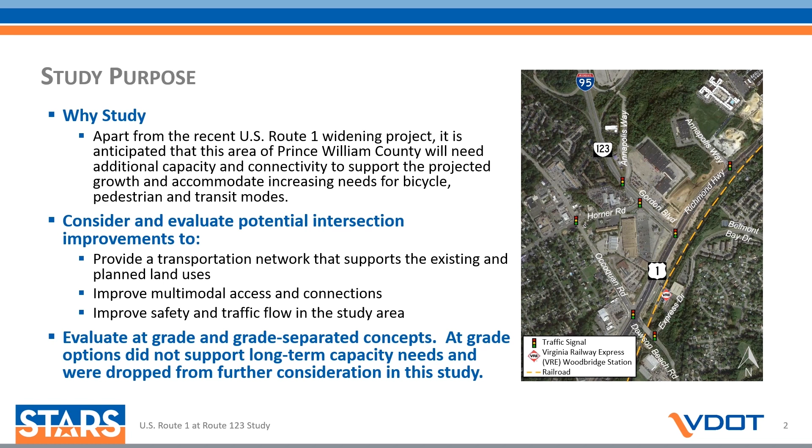Operational and safety analyses showed that the current traffic signals along U.S. Route 1 and capacity limits of study area roadways will contribute to significant congestion in the future, and the road network lacks options for east-west travel. The intersection of U.S. Route 1 and Occoquan Road and Dawson Beach Road is the only access point to the Belmont Bay community and the Virginia Railway Express station on Express Drive, serving over 12,000 vehicles daily.

There have been a few recent projects already underway or completed within the study area, and these were taken into consideration for this study. In 2020, construction was completed on a project that widened U.S. Route 1 from 4 to 6 lanes between Mary's Way and Annapolis Way. This also added a shared-use path along southbound U.S. Route 1 and a sidewalk along northbound U.S. Route 1. While this project brought many benefits to the corridor, it was designed as an initial phase of improvements at the U.S. Route 1 and Route 123 intersection. A potential second phase would extend Route 123 over U.S. Route 1 and the railroad to Belmont Bay Drive to improve mobility in the study area. Prince William County is also widening the section of U.S. Route 1 between Mary's Way and Featherstone Road, and has plans to extend Annapolis Way from Route 123 to U.S. Route 1.

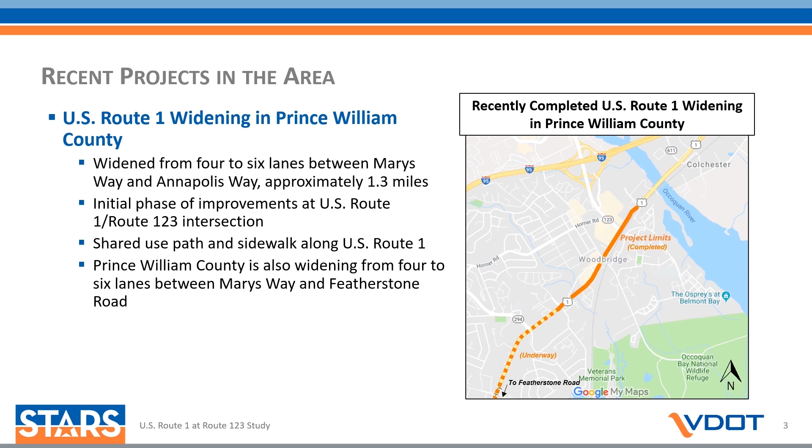In 2019, Prince William County adopted the North Woodbridge Small Area Plan. This plan provides a vision and an implementation plan toward redevelopment and revitalization. Transformational changes are planned for the land uses in the vicinity of the study intersection, including the proposed mixed-use North Woodbridge Town Center. Additional growth is expected in the Belmont Bay community and along the U.S. Route 1 corridor. This STARS study coordinates land use planning and transportation by including better accommodation of the North Woodbridge Small Area Plan as a factor when evaluating improvements. Plan density, types of land use, and mobility are being considered.

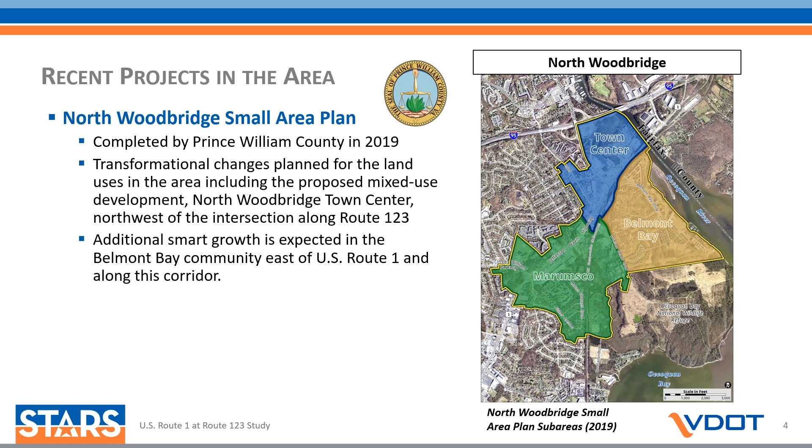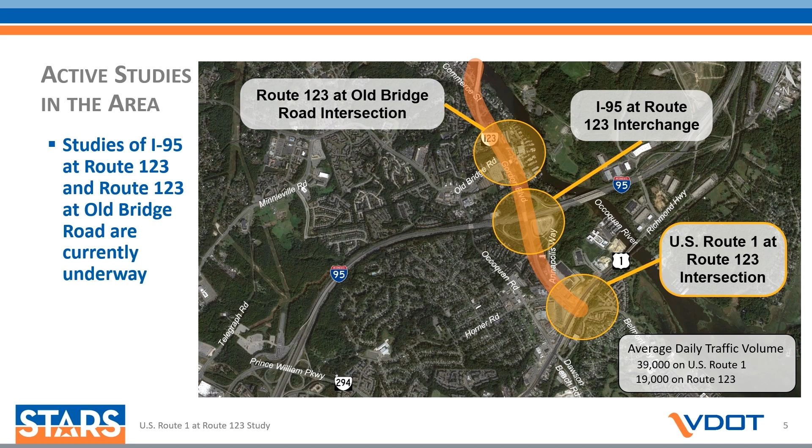This STARS study is being conducted as a part of a larger study of the 123 corridor, where additional improvements are being identified at both I-95 exit 160 and at the Old Bridge Road intersection. This video focuses on the U.S. Route 1 at Route 123 intersection. Public outreach was recently completed for the I-95 interchange, and additional public outreach activities will be conducted later this spring for potential improvements under consideration at Old Bridge Road.

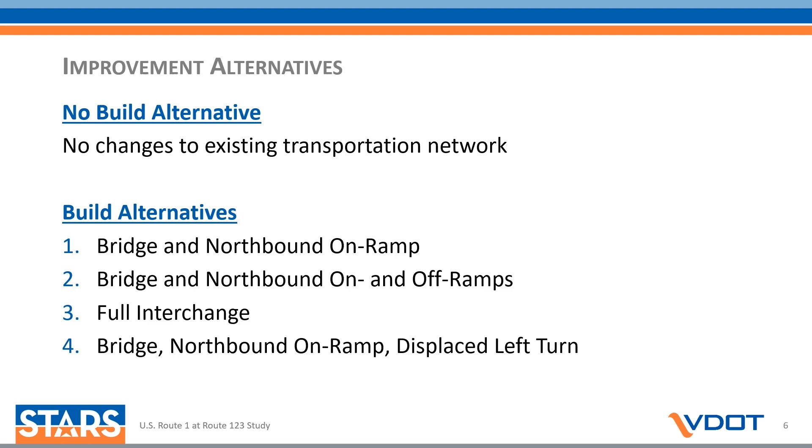The study team has conducted analyses of several improvement concepts. The no-build alternative, used as a baseline comparison, provides no additional changes to the existing transportation network and represents how the network is expected to operate under future conditions with no additional improvements. 4 potential build alternatives are expected to improve mobility in the study area with a new connection over U.S. Route 1 and the railroad tracks. This provides additional travel opportunities for pedestrians, bicycles, transit, and vehicles. Next, elements of the 4 build alternatives will be reviewed.

The first alternative, bridge and northbound on-ramp, consists of a new Route 123 bridge over U.S. Route 1 and the railroad tracks to improve connectivity with Belmont Bay and VRE. A ramp from the bridge to northbound US Route 1 will provide a safer movement for turns from Route 123 to northbound US Route 1. The ramp will add a new connection from Belmont Bay to northbound US Route 1. In this alternative, vehicles traveling from northbound US Route 1 to Route 123 reroute from the existing intersection to turn right on Dawson Beach Road and left on Express Drive to reach the Route 123 bridge. A second left turn lane is added on Dawson Beach Road, and traffic signals can be timed to support this movement. This also allows the existing traffic signal at the intersection of US Route 1 and Route 123 to be removed.

Some other existing movements would change with the addition of the bridge. Vehicles traveling from southbound US Route 1 to Horner Road must continue to Occoquan Road. Vehicles traveling across the bridge to Gordon Plaza Shopping Center must continue to Annapolis Way. Through movements across US Route 1 from Occoquan Road and Dawson Beach Road are prohibited, but can use the bridge. This will improve operations at this traffic signal and provide more green time to other movements. New pedestrian and bicycle connections include a shared use path across the bridge and along northbound US Route 1 from Route 123 to Annapolis Way, a new crosswalk across US Route 1 at Annapolis Way, and new crosswalks at the intersection of Route 123 with Belmont Bay Drive and Express Drive.

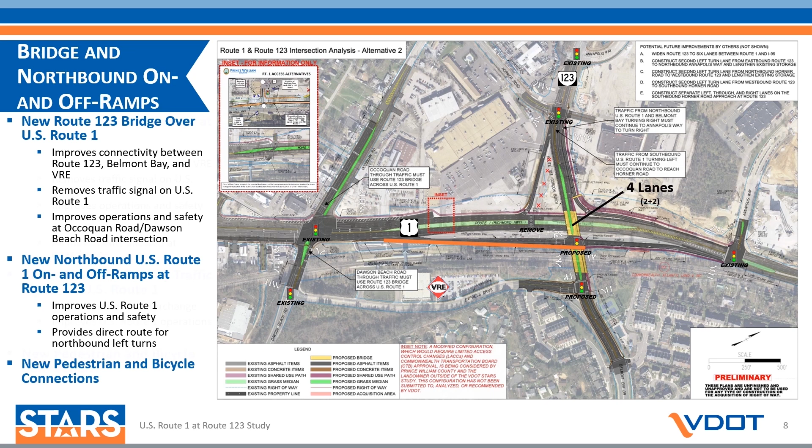Pedestrians or bicycles traveling along northbound US Route 1 must cross Route 123 at the ramp intersection instead of traveling under the bridge, like in Alternative 1. All other features of this alternative remain the same as the previous alternative.

The third alternative, full interchange, builds upon the previous two alternatives by adding southbound US Route 1 ramps to and from the bridge. This allows all movements to be made at the interchange and provides traffic signal-controlled crossings for all pedestrians and bicycles. Left turns from southbound US Route 1 to Dawson Beach Road are rerouted to the interchange. Left and through movements from Dawson Beach Road are also rerouted to the interchange.

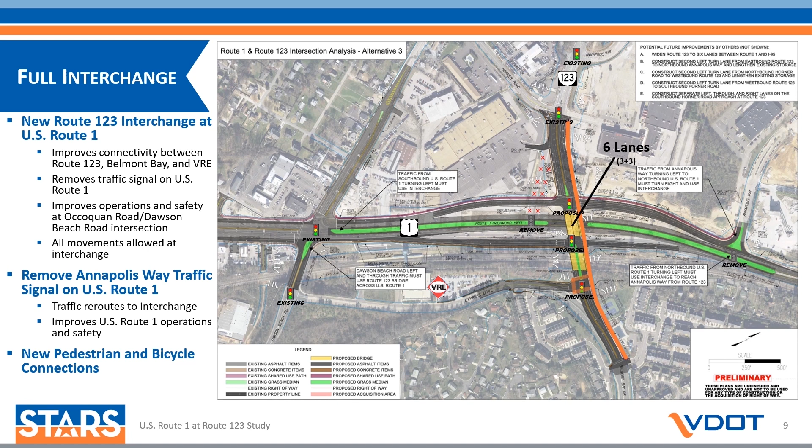The traffic signal at US Route 1 and Annapolis Way is removed, and only right turns are allowed to and from southbound US Route 1. Left turns from northbound US Route 1 to Annapolis Way are rerouted to Route 123. Left turns from Annapolis Way to northbound US Route 1 are rerouted to a U-turn at the interchange. New pedestrian and bicycle connections include a shared use path across the bridge, and new crosswalks at the intersection of Route 123 with Belmont Bay Drive and Express Drive, and the two ramp intersections.

The fourth alternative, bridge, northbound on-ramp, displaced left turn, is most similar to alternatives 1 and 2 with a few key differences. It includes the Route 123 bridge and ramp to northbound US Route 1, but maintains the existing traffic signal on US Route 1 for left turns to Route 123 under the bridge. To improve operations and safety along Route 123, only right turn movements from Horner Road are allowed onto Route 123. Northbound left and through movements reroute to a U-turn under the bridge. Southbound left and through movements reroute to Annapolis Way.

Some other existing movements also change with the addition of the bridge. Vehicles traveling from southbound US Route 1 to Horner Road must continue to Occoquan Road. Vehicles traveling from across the bridge to the Gordon Plaza Shopping Center must continue to Annapolis Way. Through movements across US Route 1 from Occoquan Road and Dawson Beach Road are prohibited but can use the bridge. This will improve operations at this traffic signal and provide more green time to other movements.

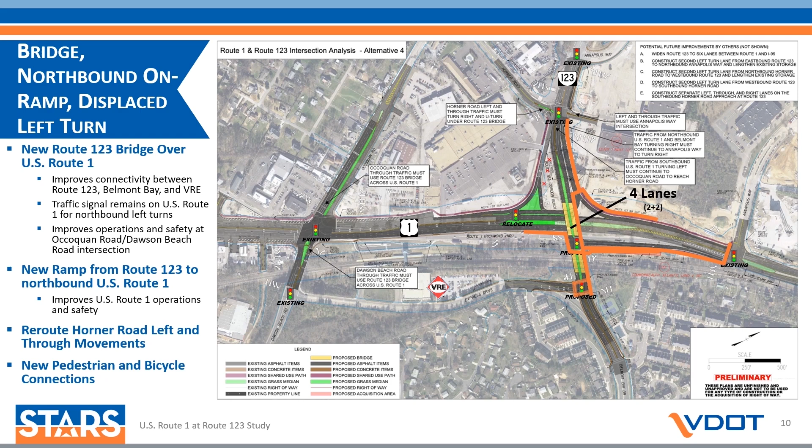New pedestrian and bicycle connections include a shared use path across the bridge and along northbound US Route 1 from Route 123 to Annapolis Way, a new crosswalk across US Route 1 at Annapolis Way, and new crosswalks at the intersection of US Route 1 with Belmont Bay Drive and Express Drive. To ensure safety, the US Route 1 shared use path does not cross Route 123 at the bridge, but crossings can be made at the Horner Road intersection.

Pedestrian and bicycle connectivity considered the amount of new sidewalks or paths. Alternatives 1 and 2 maintain connectivity of the existing network while adding improved crossings of US Route 1 at both Route 123 and Annapolis Way. Vehicle access and connectivity considered ease of access to local properties and rerouted movements. Alternative 2 provides slightly more access to adjacent properties with fewer rerouted or restricted movements.

Pedestrian and bicycle safety considered road crossings. In Alternative 3, all crossings are controlled by traffic signals and are considered safer than uncontrolled crossings. The other alternatives have one more uncontrolled crossing. Vehicle safety considered conflicting movements at intersections. All alternatives improve safety by separating major movements from US Route 1. Alternative 3 uses ramps to fully separate all Route 123 movements from US Route 1 through movements, and also removes 2 traffic signals along US Route 1.